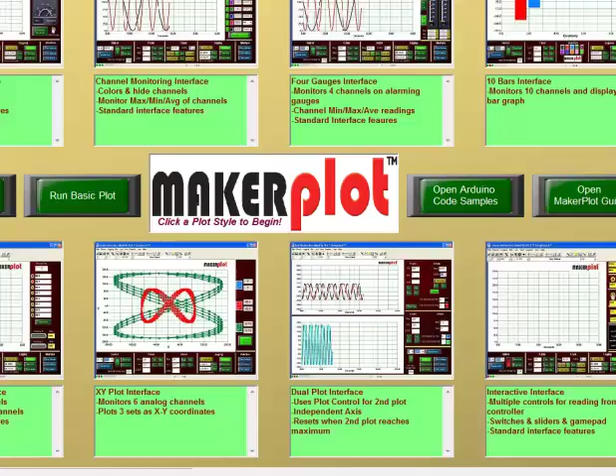The dual plot interface is unique in the sense that there are two individual plot areas rather than one. So let's take a look at it now.

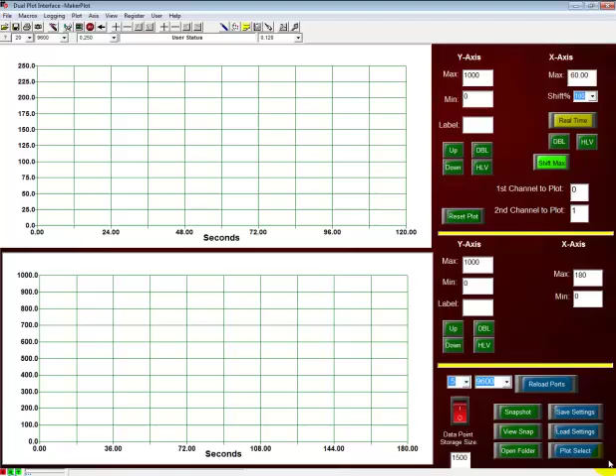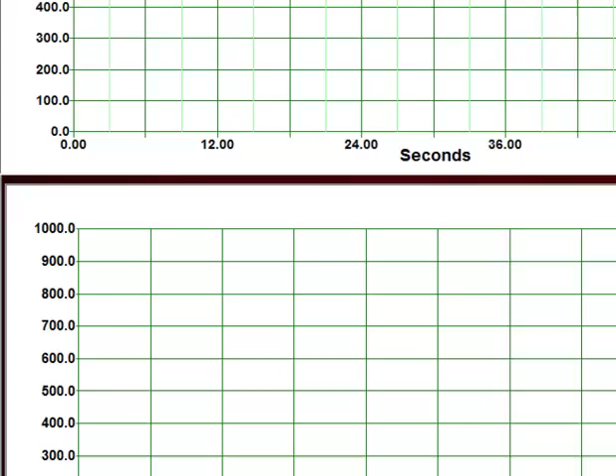As we can see, there are two plot areas. The top plot area goes from 0 to 60 seconds in its x-axis, and the bottom plot area goes from 0 to 180 seconds. The y-scales are similar, going from 0 to 1000 in both. On the right-hand side, we have the standard menu items, but they're arranged in a little bit different order than we're used to at the bottom.

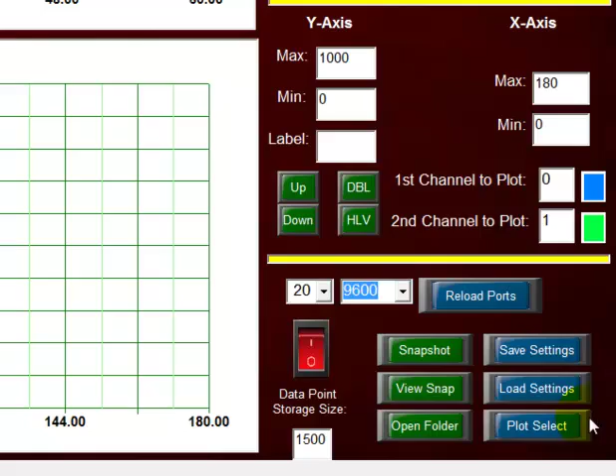Let's begin by plotting some data. Let's come down here to our rocker switch and click on it. And here are our data plots beginning.

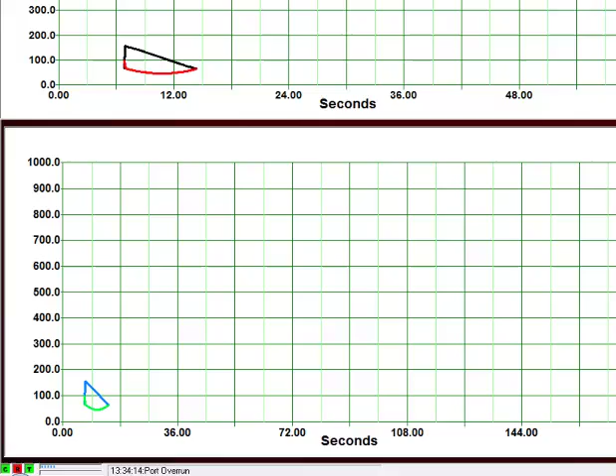We're plotting two channels of analog data on the top and two channels of analog data on the bottom, both of which, by the way, are the same channels for that matter. On the top, we have channel 0 and channel 1. Channel 0 is black and channel 1 is red. On the bottom, channel 0 is blue and channel 1 is green.

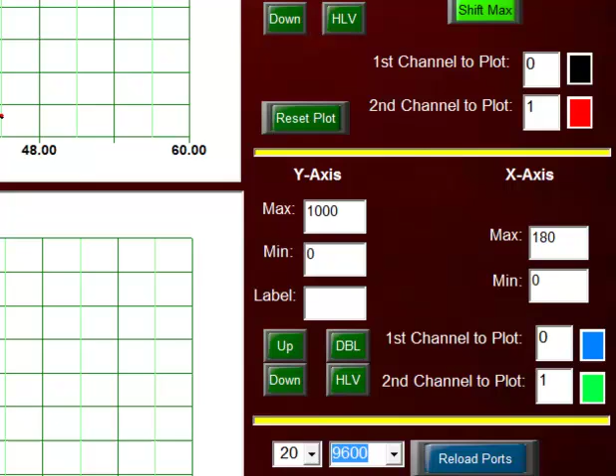So we're able with this dual plot interface to do a number of things, one of which is to change the channels that we can plot. Let's do that right now. Let's come up here to the top area, and instead of channel 0 and channel 1, let's make it channel 3 and channel 4.

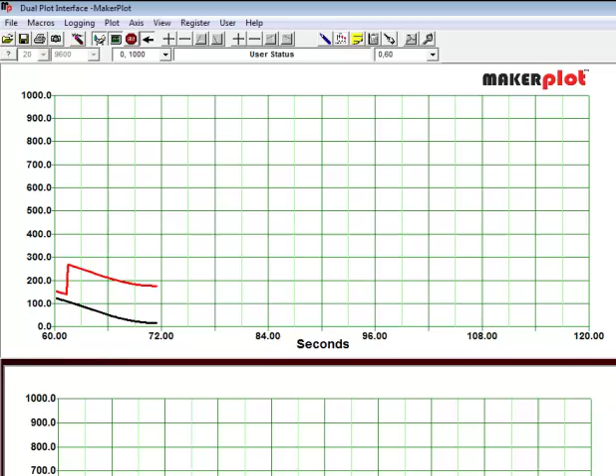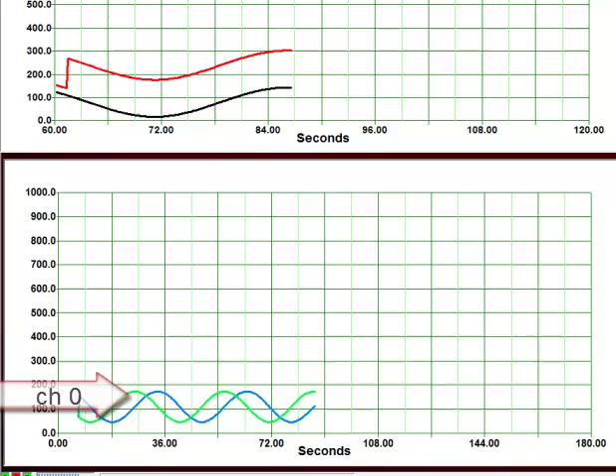Since our data input is 10 sine wave channels coming in, they're going to look pretty much similar, but nevertheless we can see now that by plotting channel 3 and 4 on our top plot against channel 0 and 1, they are different. We can also change the colors.

Let's come down here and change the color of our plot 0 to something different. Let's start with, let's say, a pinkish color for channel 0. And then for channel 1, come down here and do maybe a purple. That's how we change our channel colors.

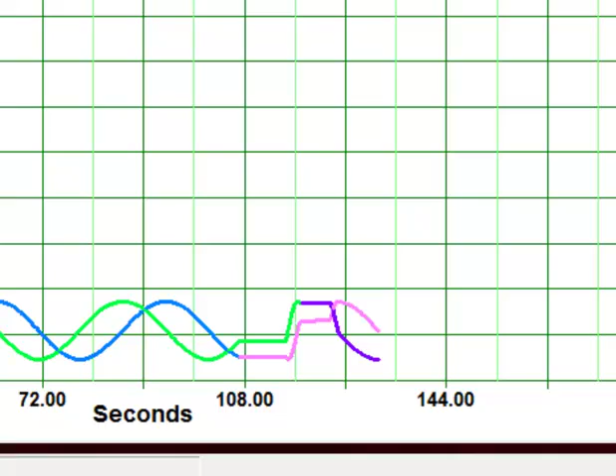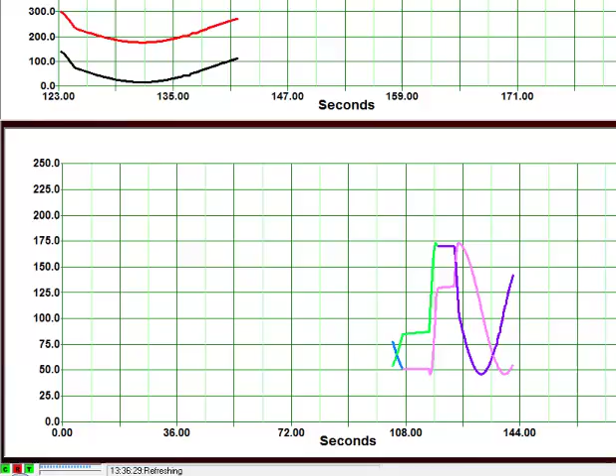And let's also adjust the Y scale, to make it so that we can see our plots a little bit easier. So now our Y scale is going from 0 to 250 at the bottom, and let's adjust it to 0 to 1000 at the top.

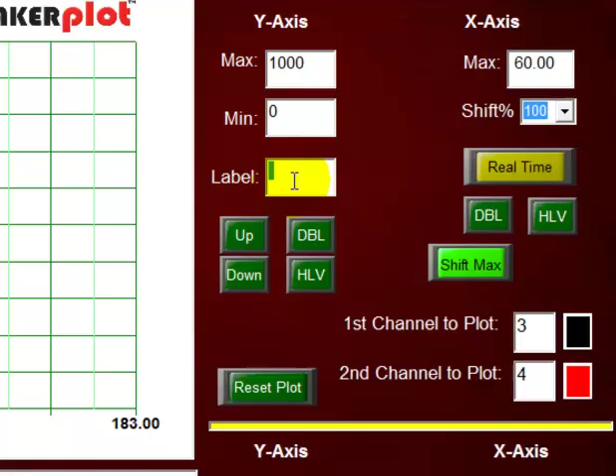We can also come in here and change our label in the y-axis to something like plot 1, and then we have our label there, plot 1. Come down here to the bottom plot and make that plot 2.

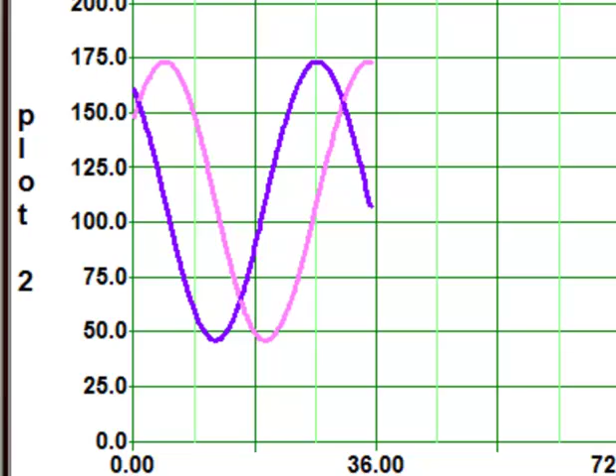So our dual plot channel gives you the ability to plot analog data in two plot windows. And once again, we have all the other features of the standard interfaces here on the right-hand side to be able to manipulate the data.